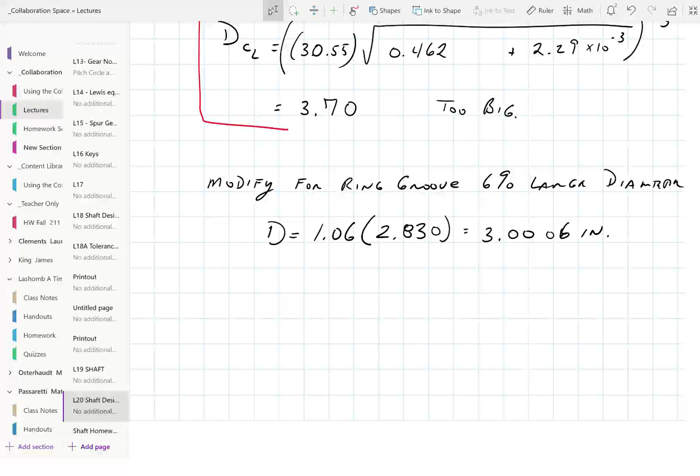And Tim, thank you for recording the other day. That was a lifesaver. No problem, trust me, it was more of a lifesaver for me than anyone else.

Okay, so we finished D right up in here someplace. Where is it? Okay, we finished here yesterday or Tuesday. So we had to get the information to get it into the torques and the moments to come up with everything, and we had to go find SAE 1170.

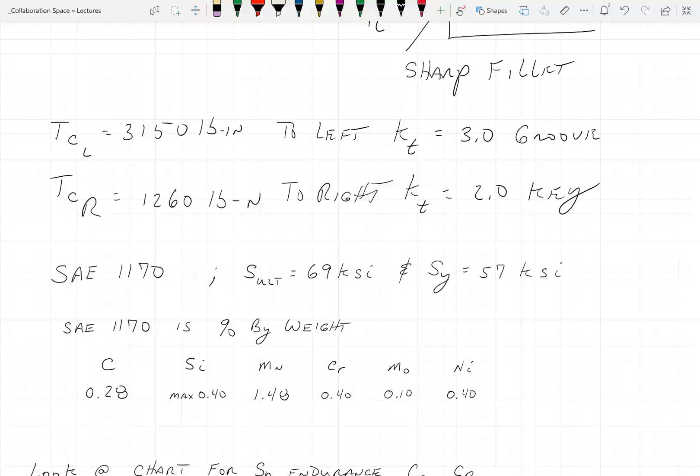I wanted to give you some details on what that was about. I don't know why I wrote CD in there. So if you look up SAE 1170 steel, the ultimate strength is 69 KSI, the yield strength is 57 KSI, and I'm going to boggle your minds here for a bit, but just so you know why we picked 1170: there's 0.28% by weight carbon in this, 0.40% max of silicon, 1.48% manganese, 0.4% chromium, 0.1% molybdenum, and 0.4% nickel.

Just one second, no problem. But the 0.28% carbon is what's really in there. So without the silicon, manganese, chromium, molybdenum, and nickel, this would have been 1028 steel, which is a low carbon steel. But we add this other stuff in to make it a little better.

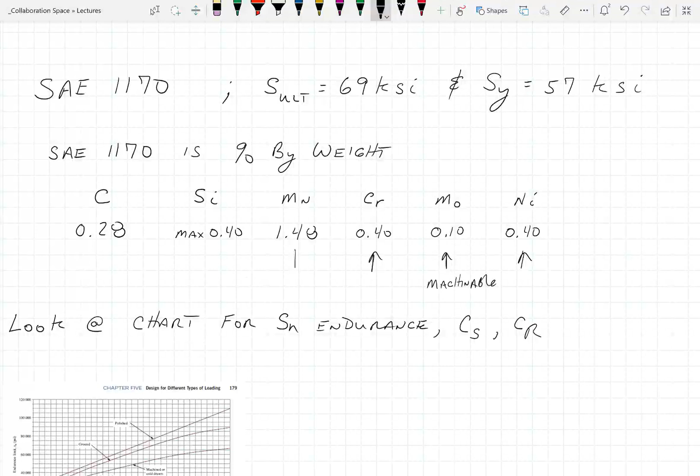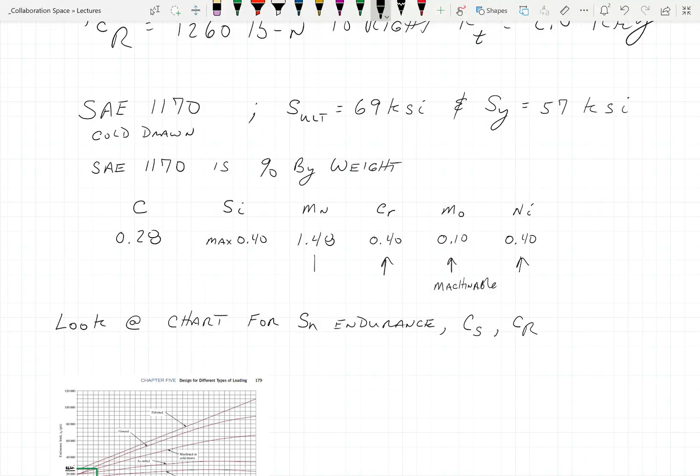So that's kind of where we're at. And I think this problem said someplace, I don't think I wrote it down here, but I think in the back of the problem it said cold drawn. So that's going to give you the kind of surface finishing. Everybody good on that?

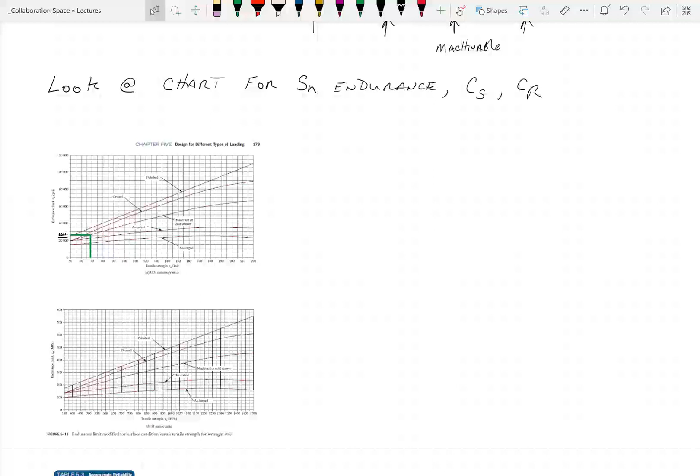Yeah, okay. So the next bit is to go find your endurance stress. We've got to find our size factor, and we've got to find the reliability. So we go to this chart here.

We take 69, and we draw a line up until we find the one that's machined or cold drawn. We go left from there, and it gives us about 26 KSI. Nobody can argue with you whether you picked this right or wrong, unless you picked it completely wrong, like 40,000, which wasn't even on one of the lines. You're interpreting a really fine detail out of a chart or a figure, so you can't really do too much with that.

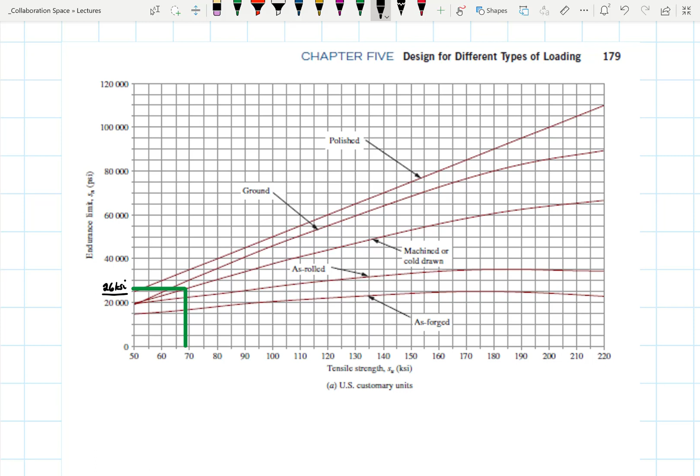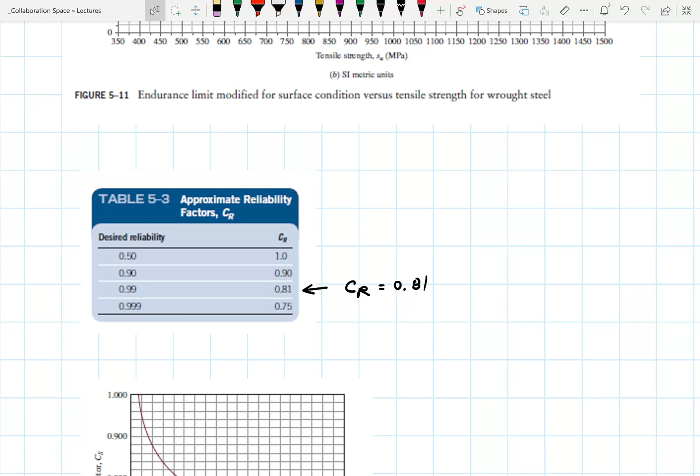So 26 KSI is going to be the SN value, that's the metric one that goes with it. Reliability is easy, pick 0.81, unless they have some other reason they want you to use a different reliability value.

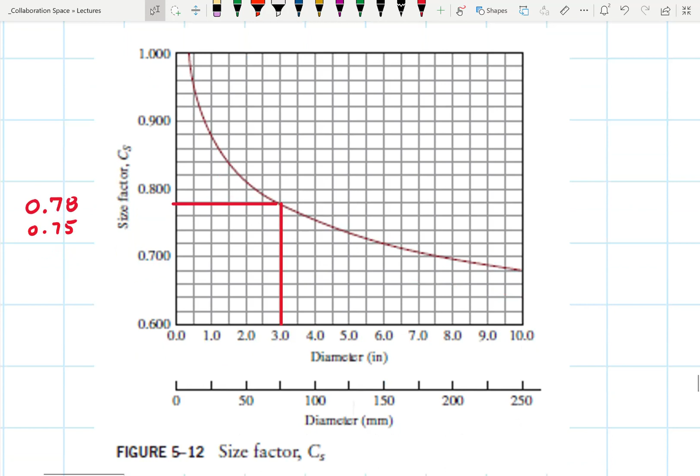Alright, the size factor. Start at the diameter that was roughly given, I think 3 inches, and run up till you hit the curve, then hang a left turn towards the CS size factor line, and it should be something like 0.75, which is what I drew here. The book said it was 0.78, so you're not going to argue too much with me. I bet it's more about where I put my line than anything else. So we're going to go with 0.78.

And then you can check to see if you are in the right place for your size factor. For 2 inches to 10 inches for the diameter, we should be somewhere between 0.859 minus 0.02125 times the diameter, and that'll give you that number if you really wanted to go back and check exactly what your CS factor is. But I'd go with the 0.78.

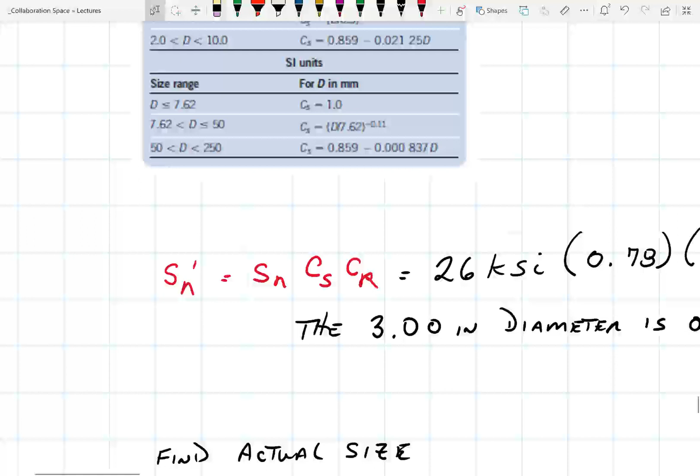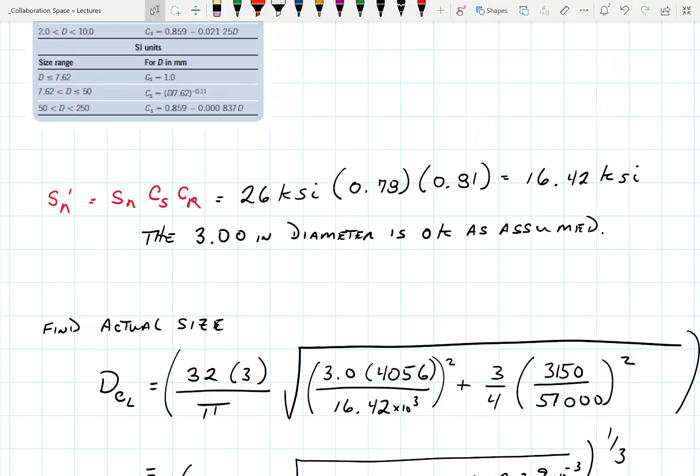Then we take all that and put it into the modification of the endurance stress. So, 26 KSI times 0.78 for the size factor, times 0.81 for the reliability, gives us 16.42 KSI, and we are definitely under the 26, so the 3-inch diameter should be okay.

We go down and check for actual size here, and we plug all the numbers in. I don't know why I didn't write down the whole equation there, but probably should go back to the last lecture anyway and see what that whole set of variables were. But 32 over pi was the section modulus, and 3 is the factor of safety here.

Factor of safety times your force in the vertical, this one's torque, this one's your force, 3-dimensional force on that shaft, divided by the values for it. Okay, so 16.42 times 10 to the third, that's our SN prime.

And then when you go over here, we're looking for the shear, or the tau stress, and 5700 or 57,000 was the yield strength. Plug all that in, we get a number of 2.83. That works. We're under our 3-inch size, our stresses are good.

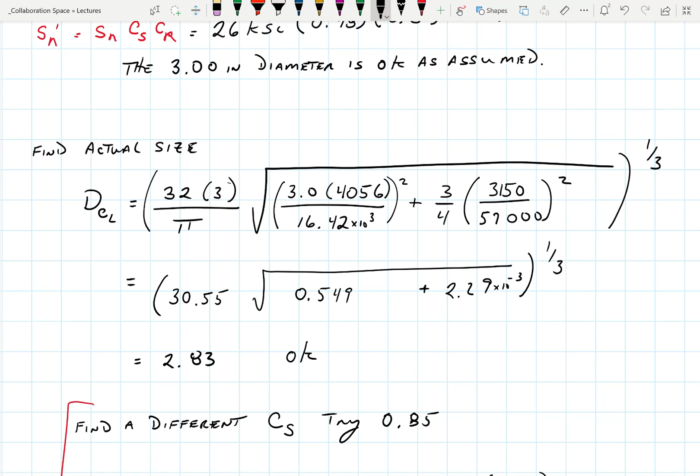The real trick would be choosing up to the next largest size. Now I did one just to show you what if the numbers were different here in your size factor. So if I picked 0.85 for the size factor itself, I'd get 17.9 KSI. Plug all that in there and we get a 3.7-inch diameter shaft in order to make that one work.

So we had 26 KSI, but we modified it to reduce it, but then we're still not playing nicely with the sizes. That makes sense? Mike's nodding at me, so I'm going to assume the rest of you probably are. And when you get all done, it's too big, so we got to go back.

And the last step to this, because we got a ring groove, and I didn't say this the other day, but it's in the reading, modify the ring groove by 6%. So you want to make it larger by 6%. So the D you got of 2.83 times 1.06 will give you 3.0006 inches. Just turns out really haphazardly that 3 was what we were planning on, 3 is what we got.

It'd been nice that it turned out like 2.92 or something like that, and then you just round up to the even number of 3. And trust me, there wouldn't be, I would never send a design up to the shop that says I need a shaft that's 3.0006 inches. That's 6/10,000ths of an inch of precision. Never. At that point, 3.00.

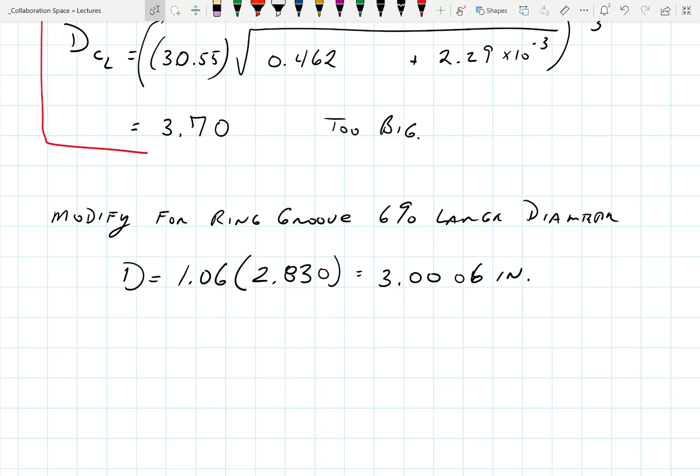Guys good there? Yeah. Yeah. Okay, that was James. How about the rest of you? Yeah, more or less, I guess.

So more or less where or not? It's just kind of like the whole process, varying from problem to problem. So you're going to get to another one here, and we're all going to kind of walk line by line down through it. Hopefully, that's perfect. I started, but I definitely got stuck.

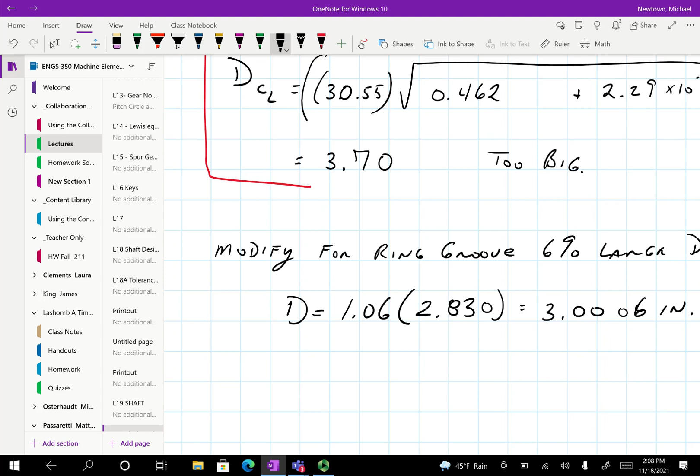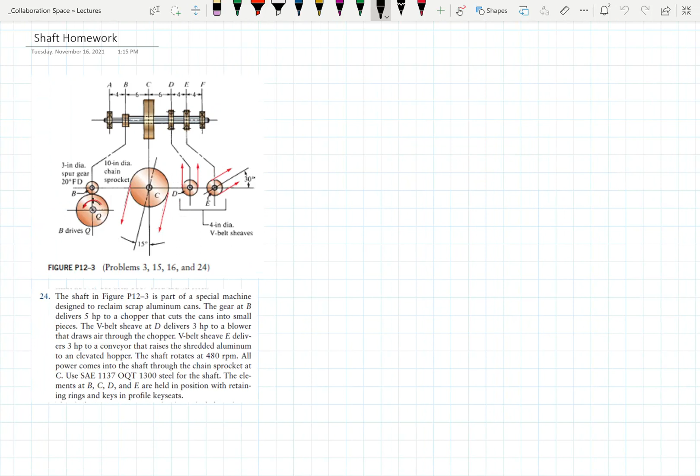All right, so that takes us to this one. All right, so we got this shaft. We got bearing at A. We got set of pulleys at B. We got gears at B, right? Yeah, spur gear. And then we got a pulley at C.

We got a pulley at D. We got a pulley at E. And we got a bearing out there. So literally we got a big shaft that when this gets all done, it could do this kind of thing. There's my bearings. And that's kind of the deflection you're going to see on this thing.

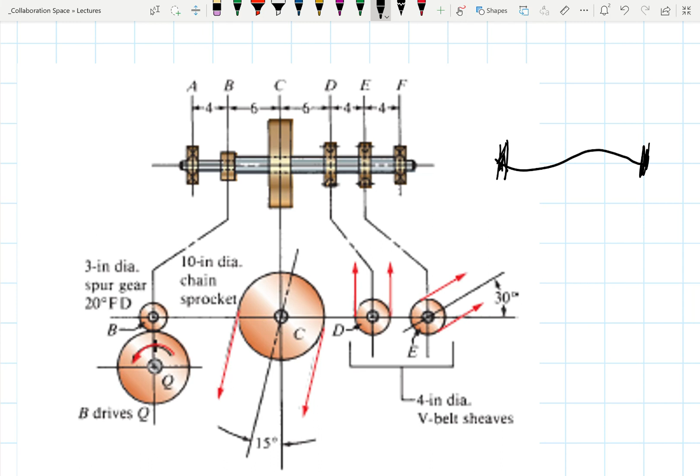Problem: a part in a special machine to reclaim scrap aluminum cans. The gear at B delivers 5 horsepower to the chopper that cuts the cans into small pieces. The V-belt sheave delivers 3 horsepower to a blower that draws air through the chopper. A V-belt sheave E delivers 3 horsepower to a conveyor that raises the shredded aluminum to an elevated hopper. The shaft rotates at 480 RPMs.

All power comes into the shaft through the chain sprocket at C. What was C looking like? C was, where's that picture? All right, so C is a sprocket. Cool, I misread that, I thought that was a pulley.

SAE 1137, so it's the same as the last problem. It's going to have some molybdenum and manganese, chromium, and nickel in it. And we are looking for an OQT 1300 steel for the shaft. I want to go look that up. I didn't even pay attention to that stuff. Cool.

I think this is quenched steel at 1300 degrees, but I want to go confirm that. So the elements at B, C, D, and E are held in position with retainer rings and keys in the profile keyseats, very similar to that last problem.

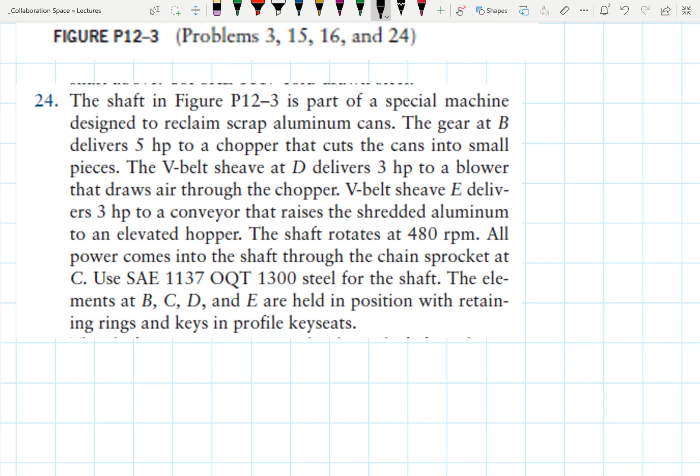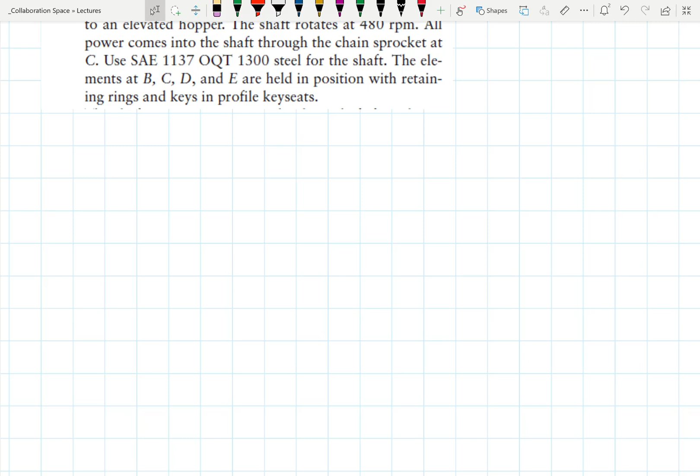Okay, so where'd you start? With the 480. Okay, so we got a shaft that goes at 480. So looking for the torques, right? Yeah, torque next, right?

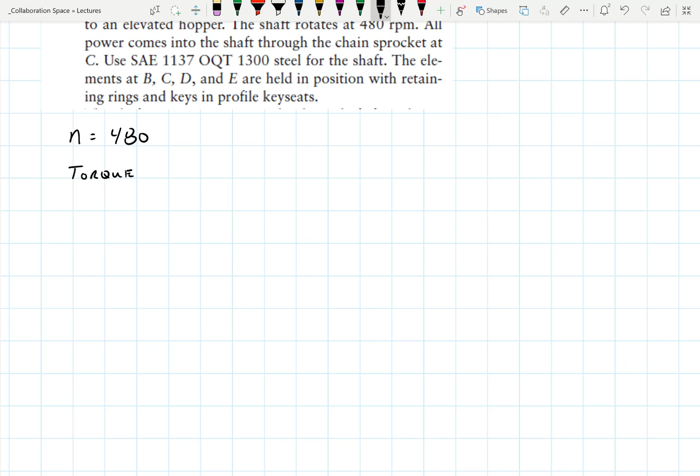For C, wouldn't we just use the horsepower of all the other ones combined since it's the only input? Right. So torque at B, actually the other thing would probably be a decent free body diagram of the horsepower here.

So this one is at B, we're delivering 5 horsepower. And D delivers 3. And then E takes 3 too.

Did I miss one? D is 3. Is that same size? Same E size is 3. Yeah, they're both 4-inch diameter sheaves.

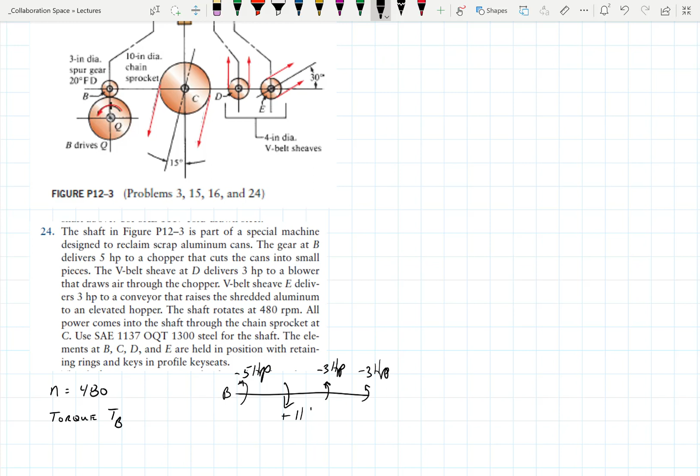And C delivers... okay, so I'm going to go C that way. So actually, minus, minus, minus, plus. So that's 11 horsepower. They didn't tell us that, did they? No, that's not something they gave us, but it's something. But that is how you get that, you just add them all up. So whatever goes in must come out. The whole thing of continuity again.

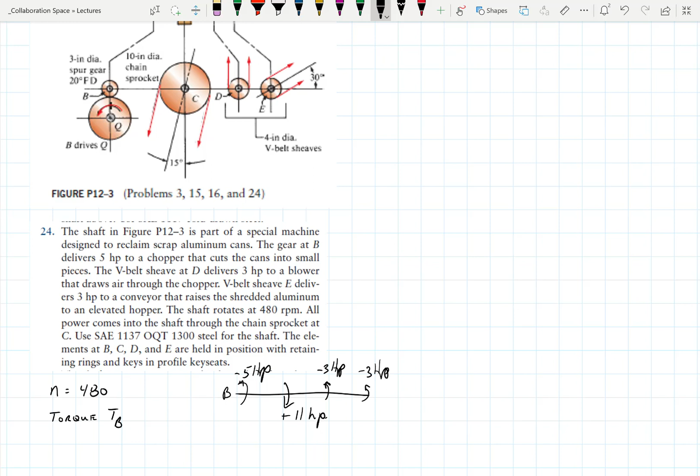Okay, so the torque at B is the conversion to get the horsepower divided by the RPMs. So just to make sure you guys understand this, horsepower is torque times the RPM divided by 63,000. Okay, and the 63,000 is a conversion factor. That's why they're always putting this in this way.

Does the 63,000 have any units for the conversion? Yeah, the units would be horsepower per RPM, leads into the pounds per inch. So it gets... no, wait a minute. Did I just do that wrong? No, yeah, so...

So we got inch pounds, we got RPMs, and we're going to get this will be 63,000 inch pounds, RPM divided by horsepower, something like that. How's that? Still not quite exactly right, but that'll suffice. Yeah, it should be something like this, James. So inches, revolutions per minute, divided by 63,000, inch pounds, revolutions, minutes, and horsepower. That's fantastic. Something like that. You can Google that one, it'll show up someplace.

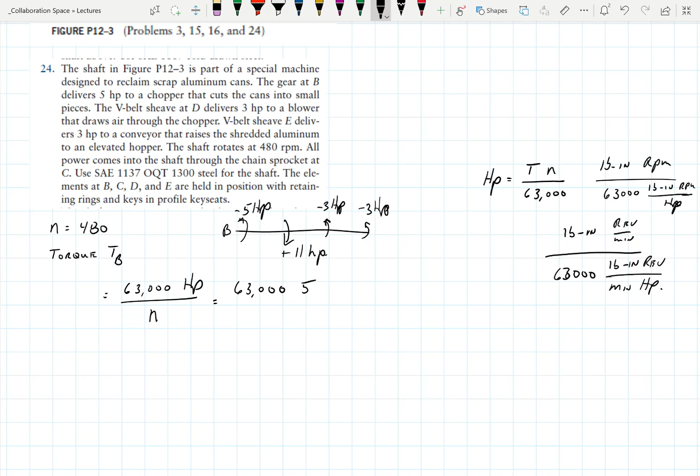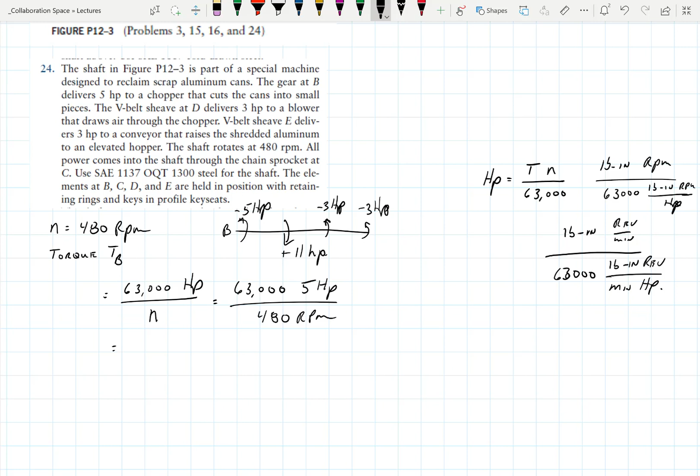So anyways, our horsepower here is 5, I'm not going to worry about the negative. What I was worried about with the negatives and the positives here, I was trying to remember that the 11 is my input power, and the 5, the 3, and the 3 are the outputs. Okay, so we're only going to play with that just to make sure that we add it up to 11. So 5 horsepower divided by 480 RPMs, okay, and that's that one. I'll give you this one as 656.

All right, so D and E are the same diameters, so we can find the torque at those two guys, torque at D and the torque at E. Anybody got a solution for that one? I had 393 and 0.75 for both. So I'd round that to 394. Don't fight with the decimals. Cool.

It's kind of like, you remember the conversations in the past where we'd go, it's 35,759 pounds per square inch, and we'd say 3 significant figures, so you'd round it up to 35,800 pounds per square inch, and we're good. Remember doing that stuff? So hanging all those decimals out there isn't going to make your life any better or worse, just gives you more numbers to play with.

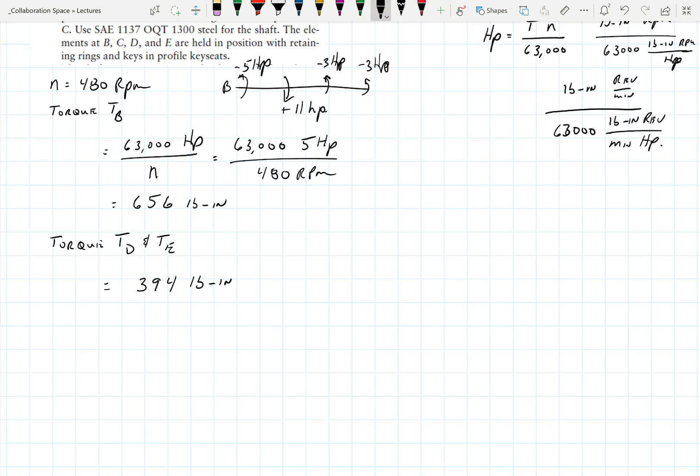All right, so the sprocket at C. So at TC, what do you get? I got 1,444. Cool. Make sense?

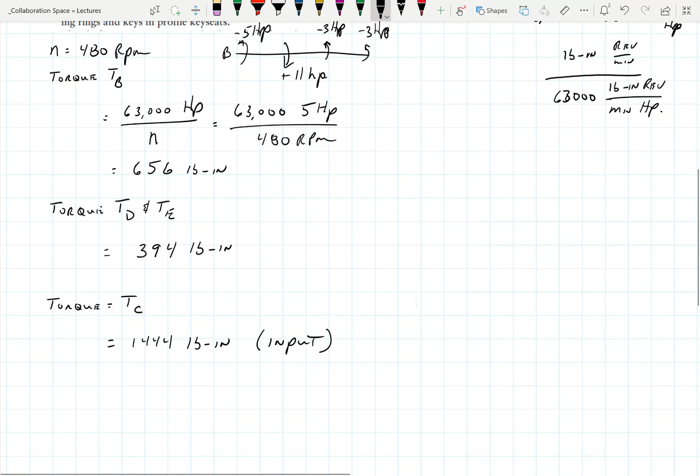Okay, that's the input one? Well, that's the input. Yes, sorry, that's what I meant. Which should make more sense when you see all this, going back up here to my little diagram, what ones were powered which way. So input was the 11, and then 5, 3, and 3 were my outputs.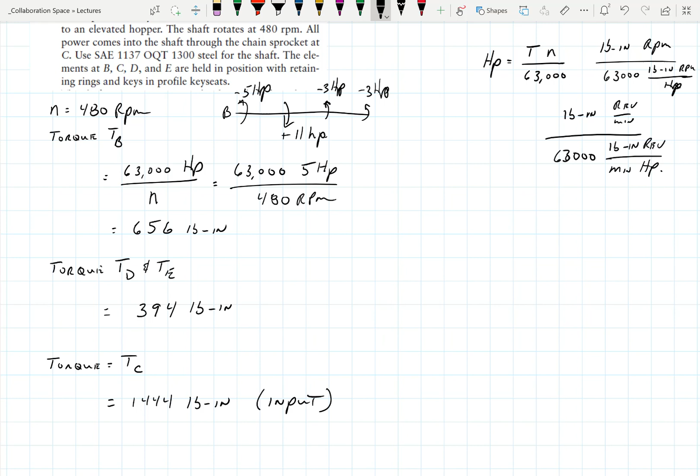Okay, here's the one thing that's new in this, and this is more for just FYI to make your life a wee bit simpler. We didn't do this in strength of materials, but a torque distribution diagram.

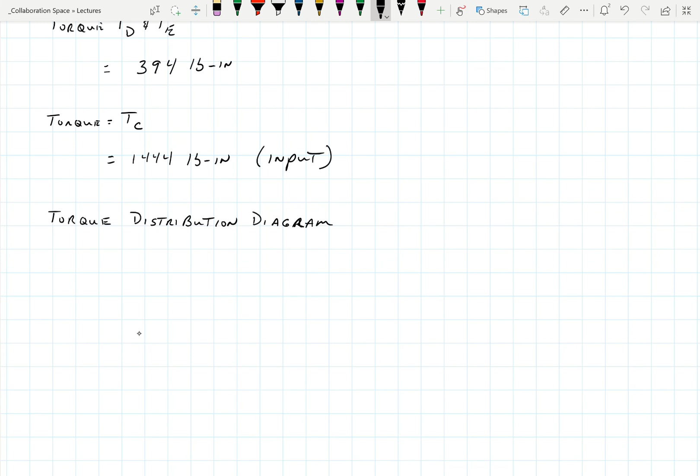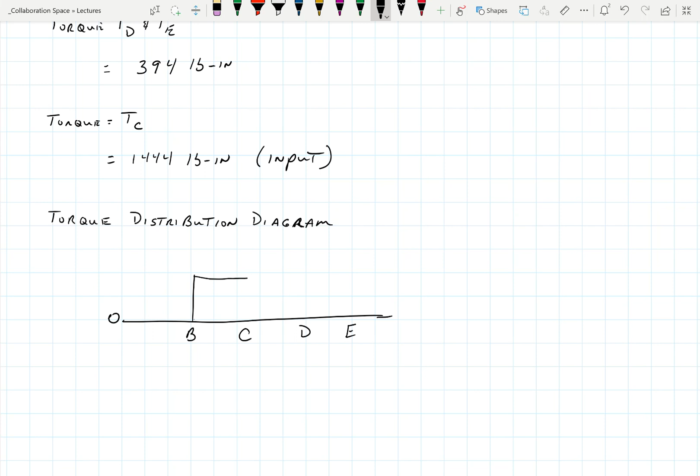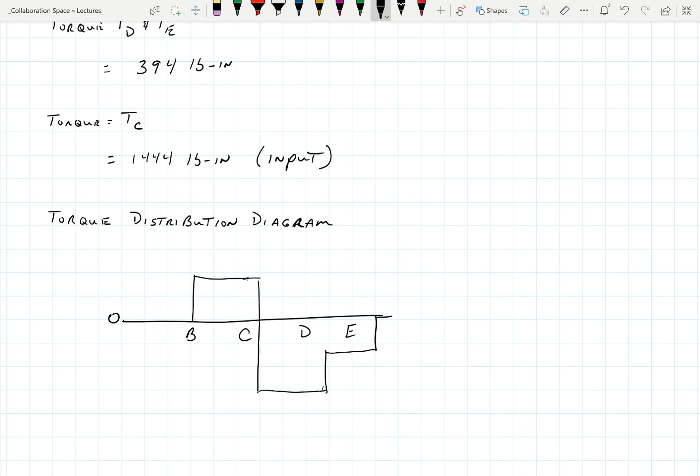So really, we got 0, B, C, D, E. Okay, so it really goes up, over, down, over again, up, over, and back. Okay, let's do that. There's a tick mark there, that one's D, let's get that one out of there. Move E closer to this side. Okay, and 656.

Okay, so this is how we figure out what point is going to basically be our breaking point with the torque, where we solve to the right and left of is C.

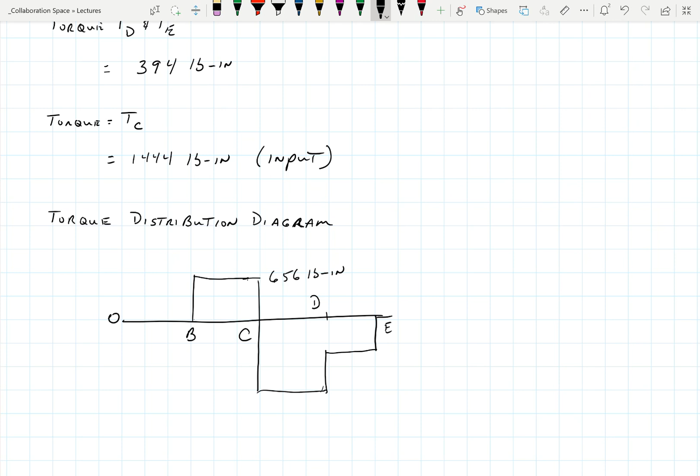Let's see, what do we got? 656 and 3... And C was 1444, so 656 minus 1444 is 788. Okay, and back up 394, so that should take us to 394, and then back to 0.

Okay, did you get this 788? Well, so this 788 became T at C was T of B minus the TC, which is kind of stupid nomenclature, I'm apologizing here. 1444, right? Yeah, 1444.

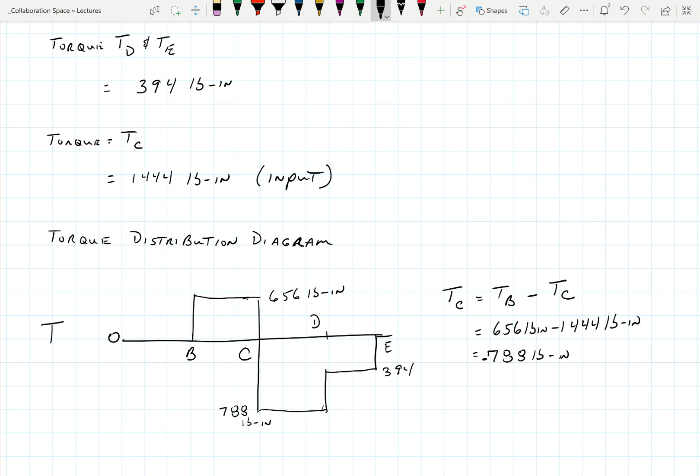So I'm looking ahead at the moment diagrams. C is not going to be our most significant place, but it is something to be worried about for a little bit here. Turns out D is actually our most critical spot. So anyways, that just helps you get an image of what you just did up here.

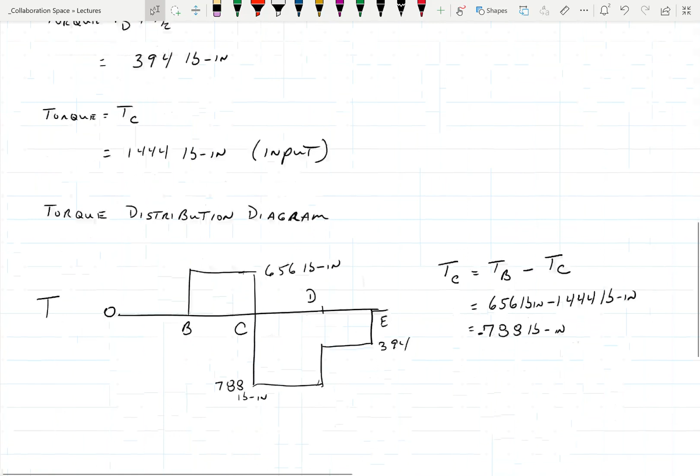Probably worth it because I don't know about you, but I'm a visual learner. If I see something, I kind of remember what those shapes look like and what goes on. All right, so the next step.

Find the force on the gear. Anybody do that one? No, this is where I stopped.

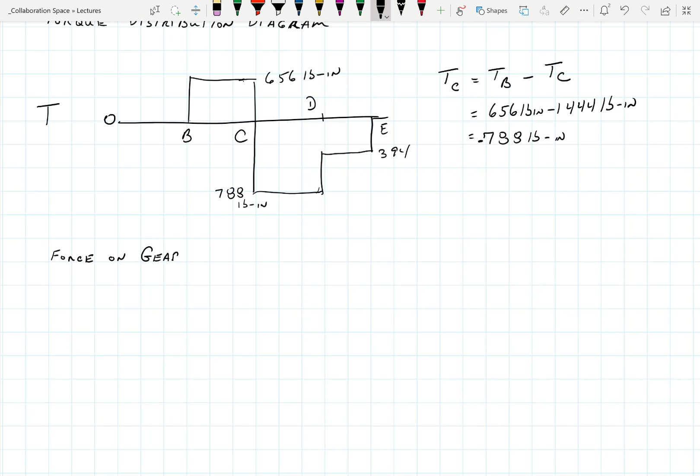Same, okay. So what's the equation I want to look at? Do you remember these two? Is it the F1 step 2? No, that's for pulleys. Oh, yeah. The gear is, remember the gear is this thing. We got this fun stuff here and that fun stuff there.

So we're looking for the radial and the tangent forces. Right, okay. So basically WTB is T at B over the radius at B.

And you guys can look the math up, I'll give you the numbers. 437 pounds, and that's FB of X.

Okay, and then I did capital R again. I don't know why I do that every time, of B.

My step sheet's not loading on Teams. What step is this on the sheet? I have no idea, I've lost track. I'm just trying to keep track of it on my paper as well. I have this one as 7 in my notes. Okay, that's what I thought. I got my step sheet.

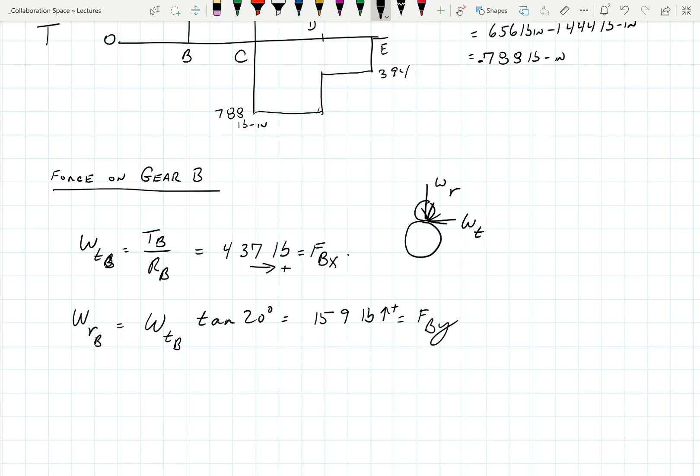Yeah, that makes sense. I'm just confused on like your numbers, where you got those from. Oh, I don't know, I'm just taking them out of the solution at the moment. But TB, like what would your TB and your RB, so TB was 656 and RB was 1.5.

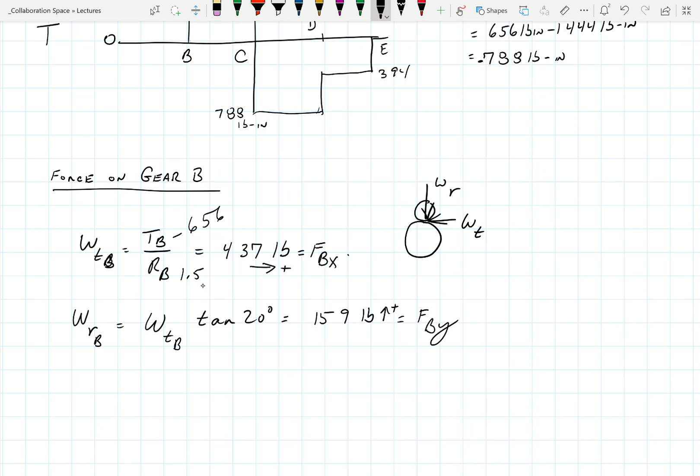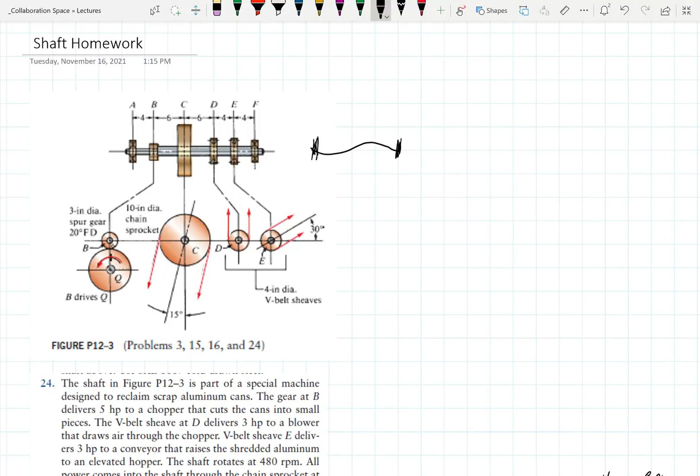The torque on that gear B and the radius of gear B. Yep. So the radius on the spur gear, well, the pinion here, that's the small one on the shaft, that's 3 inches in diameter. That make sense, Matt?

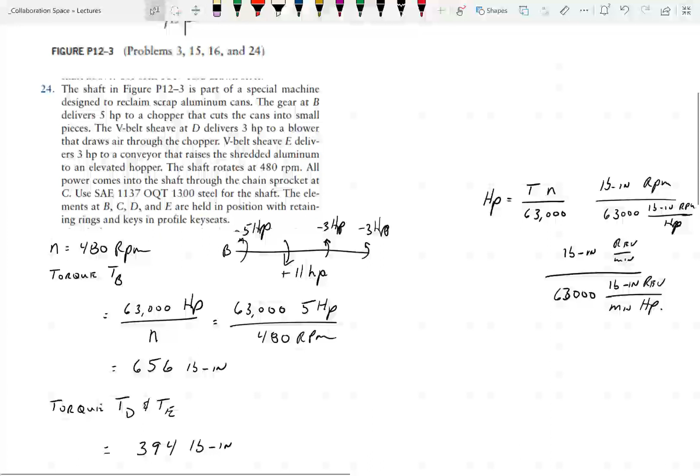Yeah, it does. I'm just trying to look at the picture and swipe back and forth between the notes. Yeah, it's kind of where, I hate to say this, I'm not sure how to do this electronically that way. Almost years ago when I had the book out, I always just had the book laying there and I could look back at the picture, and even though I had stuff on my sheets, I didn't have to go all the way back, so.

Right, I get it, we just took our torque and then we just had the half. Yeah, take the torque and divide by the radius to figure out what the force is. It's more or less the nomenclature that messes me up, it's just like all the switching around and stuff.

Okay, all right, so that's the stuff on B. All right, now find your force on your sprocket.

Sprocket, SP rocket. Spacely sprockets, we're here to say. Sorry.

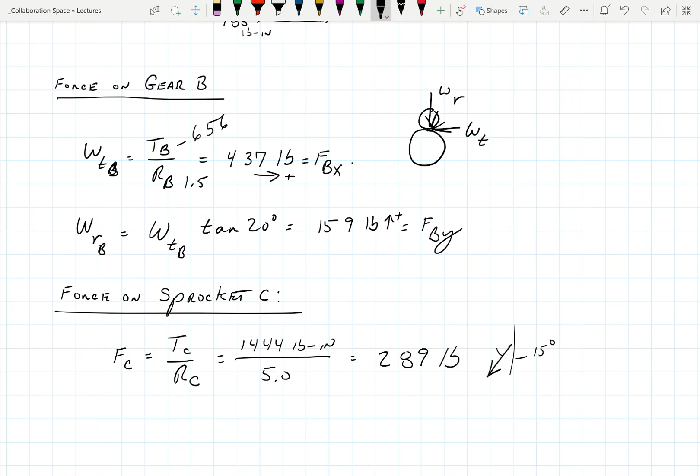And that one's going down in that direction at 15 degrees, off your drawing up here. So that guy right there, keep that in mind because we're going to have to convert that back here in a second.

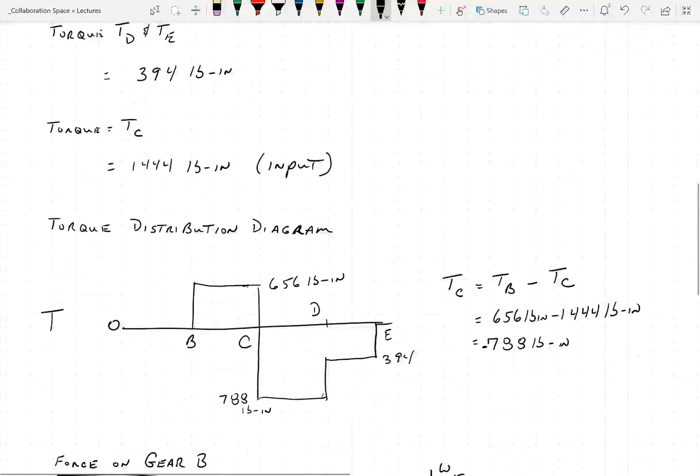Okay, so F C of X is your next step, because we've got to take that three-dimensional force and take it two-dimensionally so we can put it on the shaft, figure out what the moments and shear diagrams are going to look like, find the max moment, and combine them back into a three-dimensional moment. It's all about decomposing things and then reassembling them.

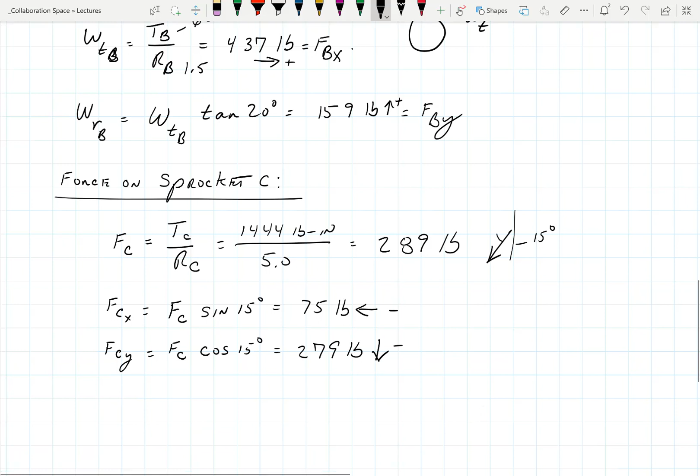Okay, so those are the directions going down. So that's a negative, that's a negative. Everybody good up to that point? Yeah, doing pretty good. So what's left?

Okay, so we got the forces on sheaves. I actually have a question.

Sure, why did we... out of this, maybe it's just because of the equation. Why did we use tangent for B, but we broke it up into components for C with the 15? So what's said in the picture? This one is 20. We are looking... get out of there.

So if I was to take these forces, the radial force acting on a gear and this one working this way, let's do it in the right direction. So this there and this there, okay? WTB here and WRB there. So if I want to know what that is here... actually I don't want to do that one, sorry. I want to do that one, so that I know what the W is on that gear.

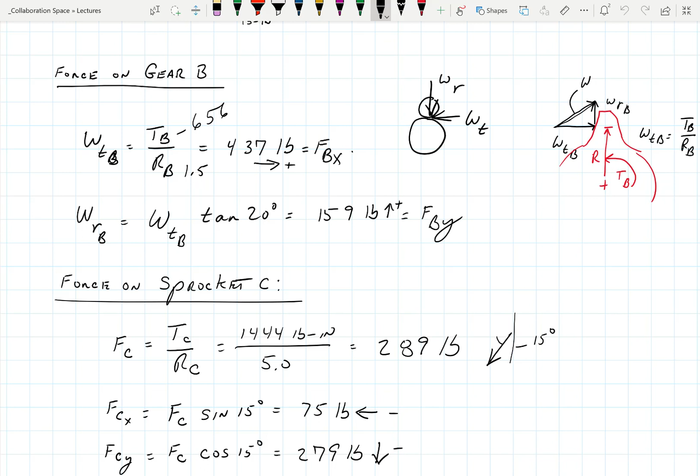But as I strike that, I'm actually doing the force in this direction, W, but I know it's the tangential force that I'm playing with. And the tangential force comes from the torque at B and the radius from here to there. So the one that I know, Matt, is WTB is TB over RB. That makes sense? Yeah. Okay, and then in order to find the vertical force of that, I got to take what W is and do the tangent of it. Got it, okay.

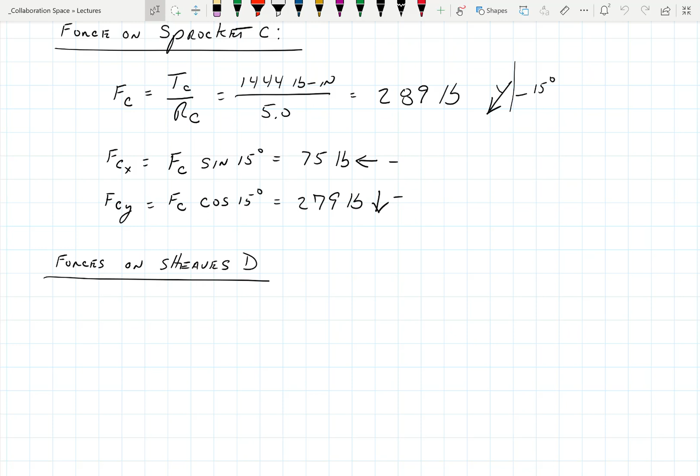Okay, so we are the sheaves. Mikey, this is your equation, I'm gonna name it the Mikey equation. Oh boy. Somebody probably already has dibs on it, but...

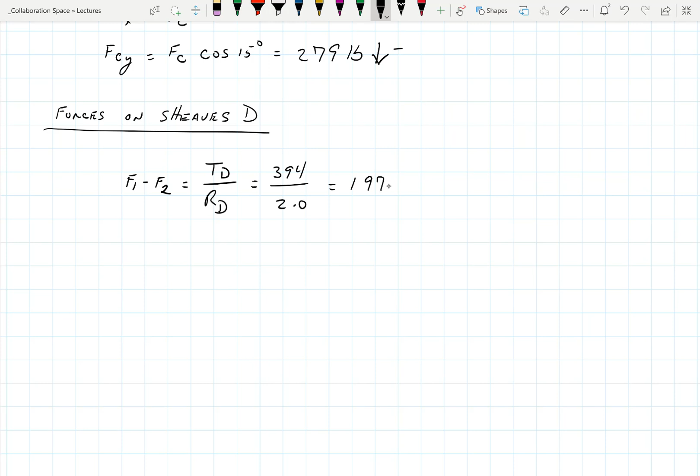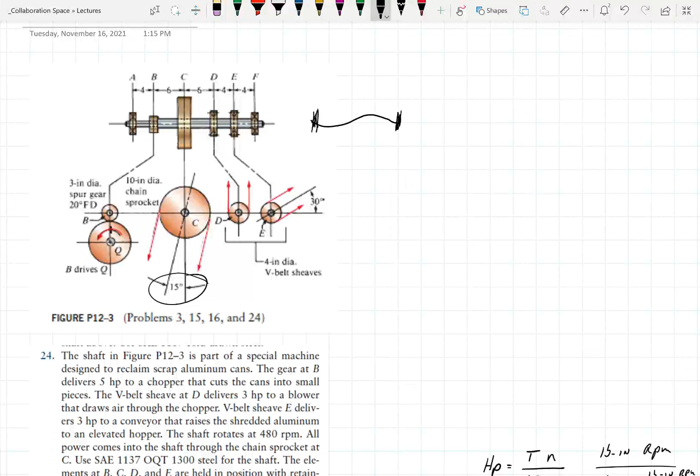So if you look at these, let me go back up here and get this picture. So D is actually working straight up. E is going to be off at a 30-degree angle, but let's do it this way. So what I'm looking for is I got this and this, F1, F2, and I'm really looking for this, okay? So in order to get that, I gotta know what's going on with the two forces on each of those belts.

Okay, so again it's still the TD. So I literally have this going this way. I got a torque, and I got some radius R, and that is why F1 minus F2 is equal to T over R. Make sense?

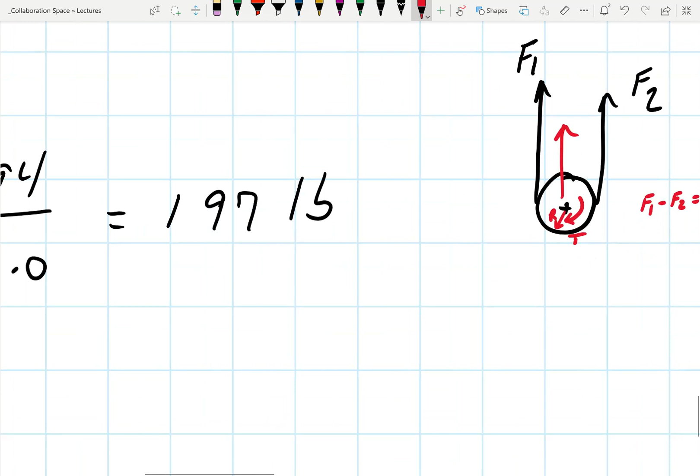Yeah, okay. And that's specific to the sheaves, right? Because I got two belts. I hate to say two belts - I always think of it as two belts, but I got one belt that's under great tension, and one belt that's not under great tension, but it's still pulling on the shaft, okay?

So that's why it's F1 minus F2. F1 is usually your drive, F2 is the one going the other way. Okay, and so then we just end up using that to find the total force.

Yeah, so FD here is what this is: F1 plus F2, which if we do this - someone figured out years ago that if you do this, you can get 1.5 times 197 pounds, you will get 296 pounds. So I relate it this way, which is maybe not the right way, but it always helped me think of it.

F1 is 1 and F2 is 0.5 - it's half of what F1 is. Not really, but it makes some common sense if you think of it that way. F2 is under slack, it's not pulling the same force. That makes sense?

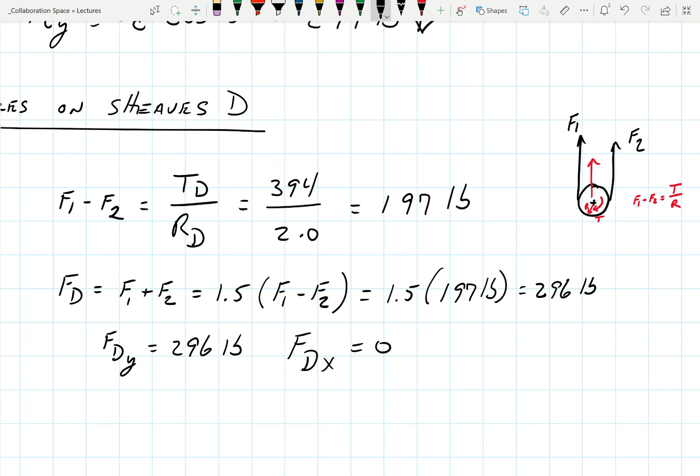Corny dumbass way to try to remember it, but okay, everything on this one's going vertical, so this FD is really FDY is 296 pounds, and FD of X is 0. Okay?

And that's going up. All right, now force on sheave E: FE is equal to FD, which is 296, because they're the same diameters and the same RPMs.

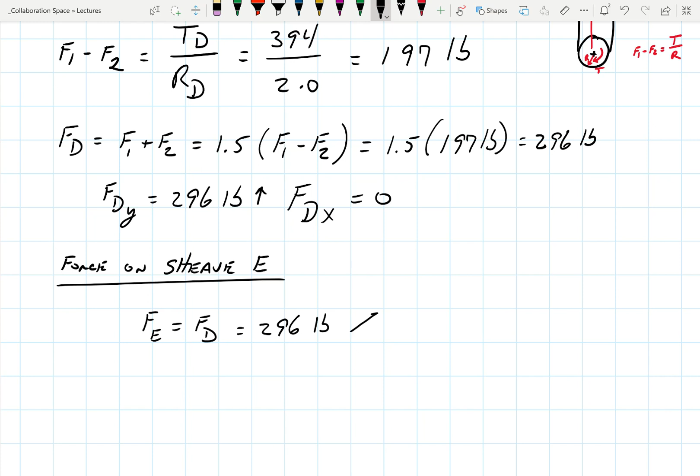But it's acting at some weird angle, which was what? Anybody remember what that angle was up there? 30? Yeah, 30 degrees.

Okay, so 30 degrees. In essence, we are going to get FE of X, which is FE times the cosine of 30 degrees, and we're going to get 296 cosine 30 degrees, and that's 256 pounds in that direction.

FE of Y will take you to 148 pounds going vertical.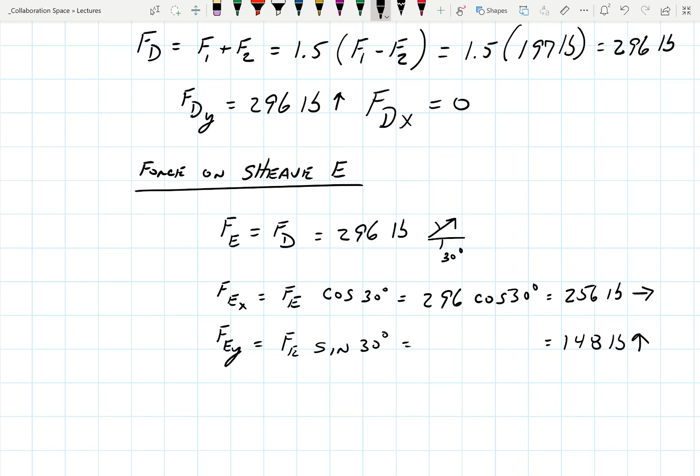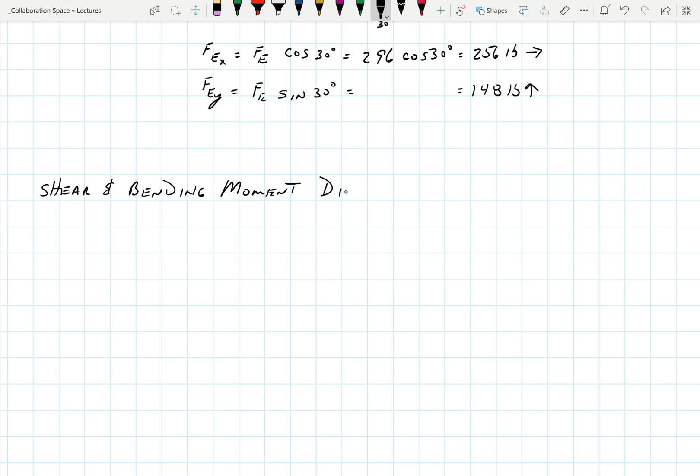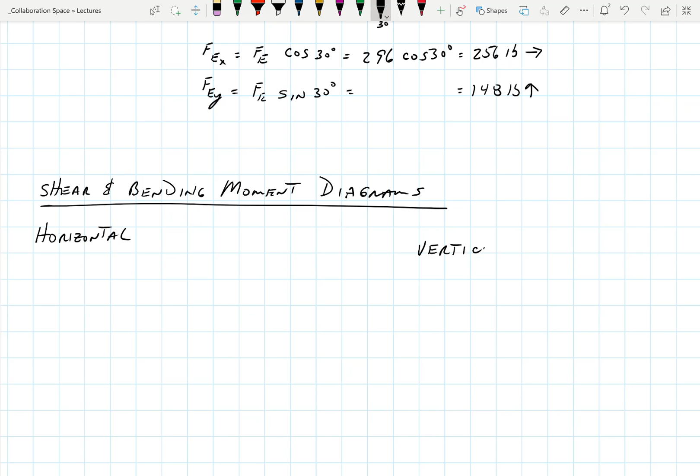All right, so now you're down to... we got to do horizontal, and we got to do vertical. Okay, so your free body diagram looks something like this.

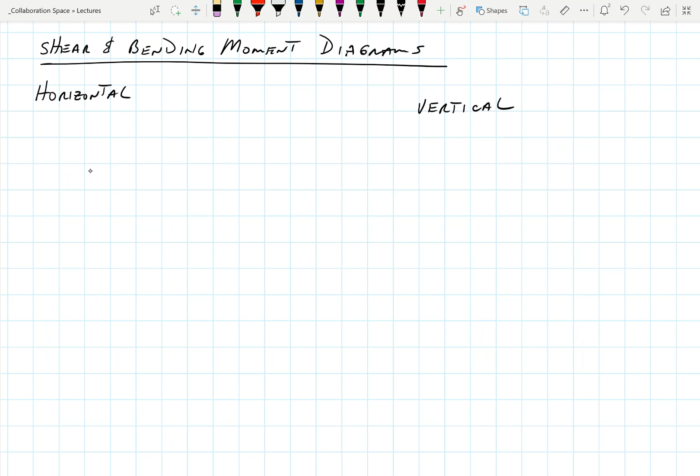All right, so we got A, B. A, we got 4 there. B, we got 6. We got a force here, that's C, we got 6. We got D, whoops, we got a D. We got E, that is this, that's 4, 4, and we got an F out here.

All right, did I miss anything? Oh yeah, B's climbing upward. All right, so 437, 75, right? What's that number? 75. 256.

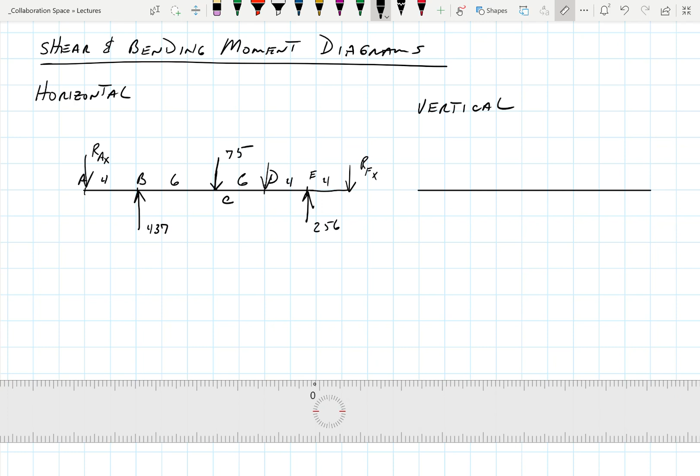Okay, and then you got to find your reactions. So basically a little footnote here: find reactions, RAX and RFX. Okay, you guys can do that part.

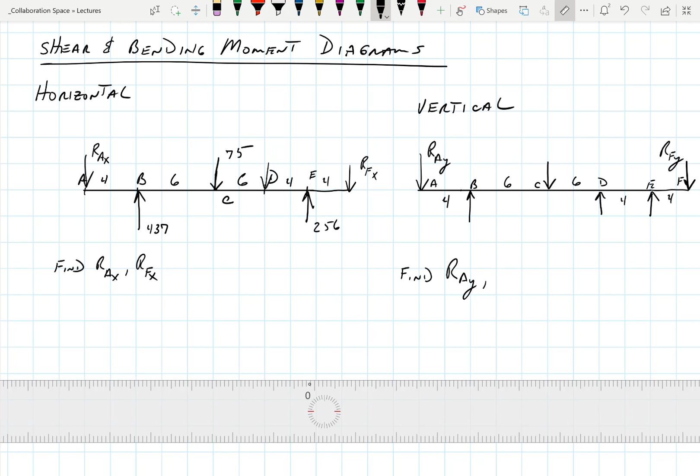A, B, C, D, E, F. And we are 4, 6, 6, 4, and 4. Okay, find reactions, RAY.

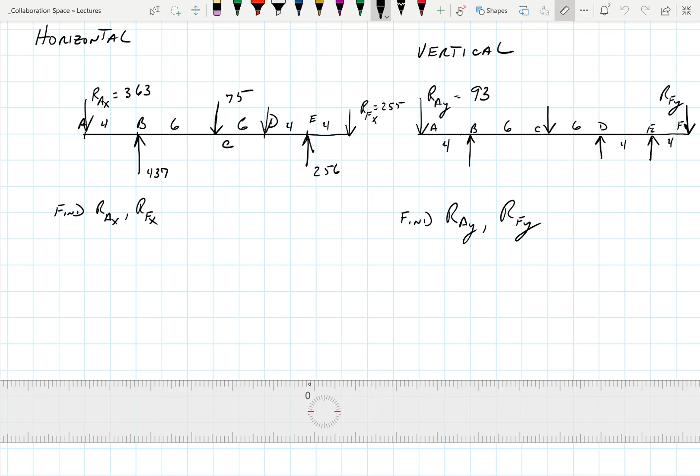363, and this one is 255, and this one's 430. No, 93, and this one is 231. Is that right? I think that's right. Good there?

I'm going to let you guys draw the shear and bending moment diagrams, but I'm going to give you the answers so you can see what they look like.

So you want to find that, which is going to be your max moment at D of X squared plus max moment at D of Y squared. And if you do this right, you should get 1613 pound-inches.

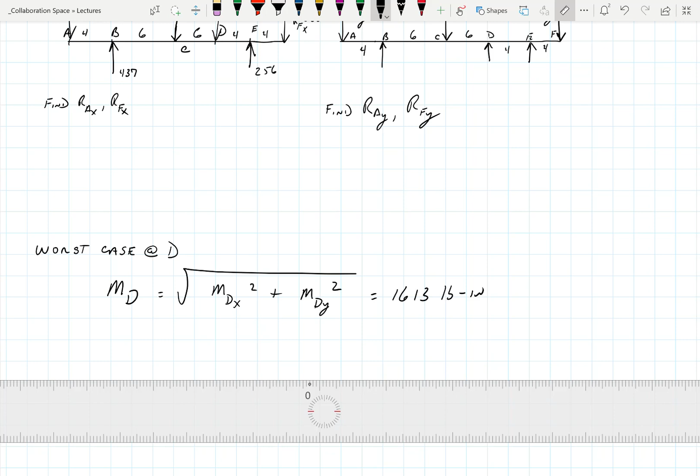And everything came with a ring on it, right? I'm pretty sure. Instead of a ring groove. So TD is 738 pound-inches at D, to the left.

With a KT value, because it's a ring groove, at 3 for a retaining ring. They also have keyways as well. They do what? They all have keyways as well.

Okay, I'm pretty sure, well, we'll deal with that one. What are we gonna deal with that one? Yeah. So KD is 2.0, right? No, 2.0 for keyways.

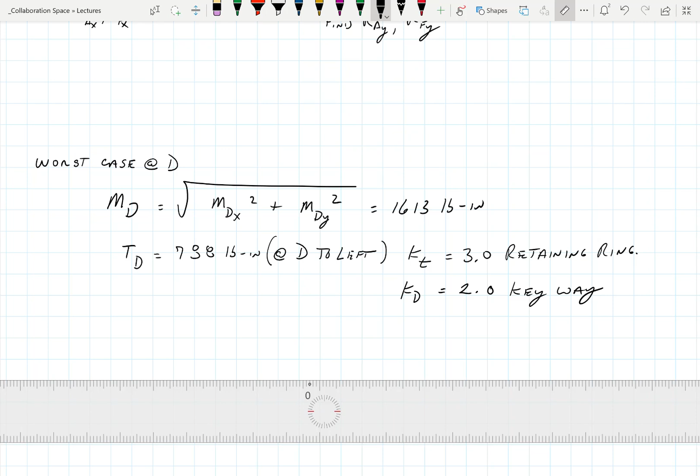What did I use in the last problem? Two for keys. Okay, so far so good.

You guys got to draw the bending moment diagrams, come up with some numbers, and then really we're just down to this step.

So, SAE 1137 OQT 1300. It's got an S ultimate of 87 KSI. We get an SY equal to 60 KSI. And then your SN, you got to grade it off the table, should be 33 KSI.

Okay, then what you're doing is looking for S prime N, which is going to be SN times your CS and your CR. And remember, this CS right here is just an estimate. So if something goes wrong and you don't get the right size, go back and change your size factor, make it bigger or smaller, which is why a spreadsheet would be really handy.

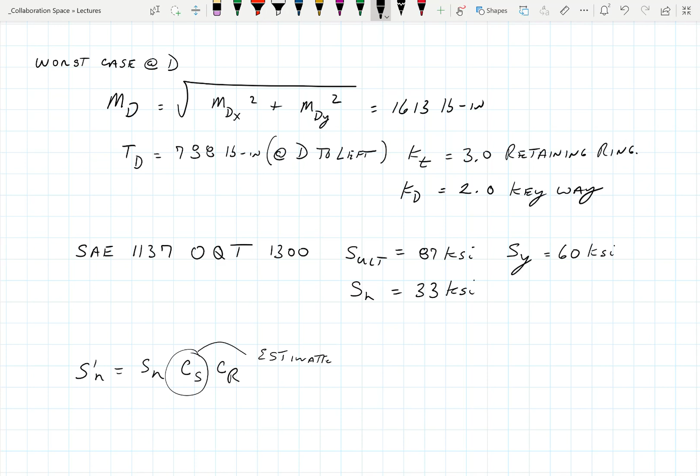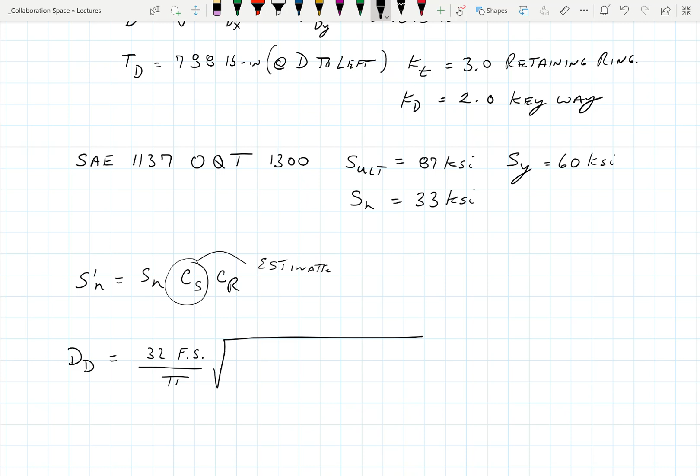Okay, from there you're going down to D for D, and we're going to do 32 times the factor of safety divided by pi, square root of... you know, it really sucks when that equation's not right there. Where did I put that puppy? KT M over SN prime.

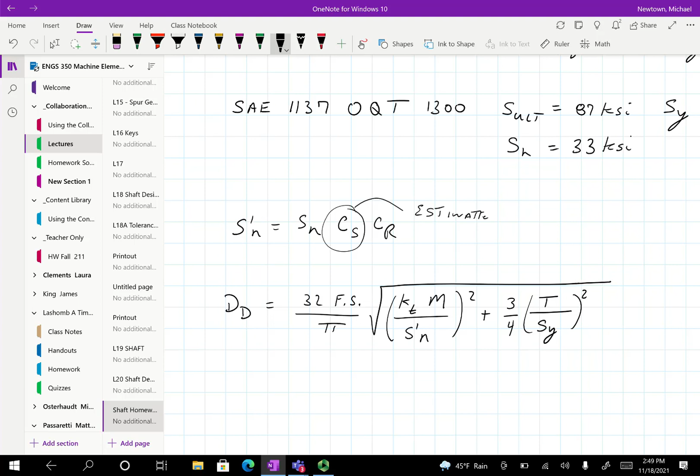Okay, one little footnote here.

Okay, so we want to go with the 3.0 for the ring. Okay, the key is going to affect it, but why don't I carry so much weight on the key? Remember what I did at the last problem here? I unfortunately don't. So remember, I multiplied the key times 6% to make it larger, or the shaft by 6% to make it larger, right. So the key is a stress factor, but the ring groove itself is going to dominate.

Okay, if I didn't have a ring groove, then go put the keyway in there, because that's the one that's going to dominate. All right, so that one's going to go to 3.0. So essentially, you just use the higher KT value of what you have in the problem. Or what is it? I'd say yes, but I want to make sure that what you're getting isn't just choose the higher one. I want you to think about which one is going to help increase the size of things, make it bigger.

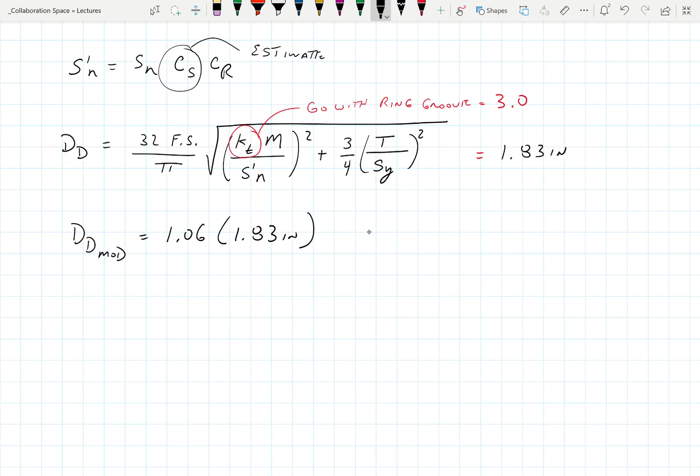So the ring groove, when I get all done, I got to multiply times 1.06. So I'm going to wind up with... well, actually I'll give you the answer here. So the answer to this one turns out to be 1.83 inches. But then I got to go DD modified, which is going to be 1.06 times 1.83 inches, and we're going to get 1.94. So we're going to specify 2.0 inches.

So if I do this and put in the KT value, this diameter is going to be smaller to start with, and I don't want to do that. I want to use the one that's going to give me the larger diameter to start with and then modify it, right? Okay, makes sense.

Makes sense, let's see what's left in this problem. So when you're done there, go check your CS of, what do we use? Oh, I didn't tell you what we used.

Anyways, go back and check that, check CS, and recalculate.

Diameter at D required. And you'll get something like 2.01, using DD of approximately 2.0 inches is okay. And those are the steps to that solution. Cool?